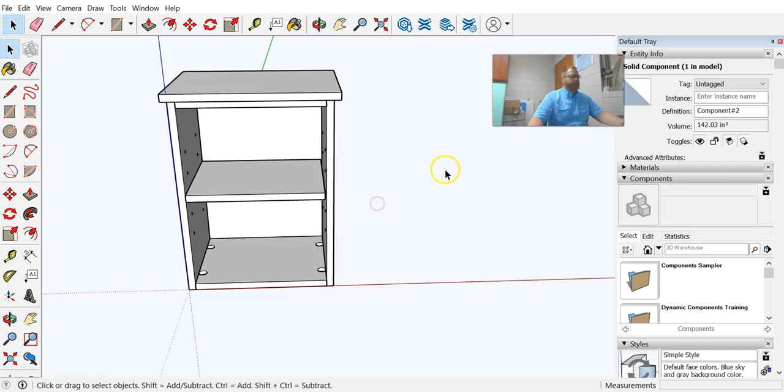Now it's time to take this drawing we've made in SketchUp and bring it over to Vcarve Pro. I'm going to do one final check, clicking on all these parts to make sure they come through as components, because SketchUp parts that are components will get disassembled when it comes to Vcarve. If they're merged together or not all components, it'll come in as one big clump, and we'd have no way of machining that in Vcarve Pro. So a couple steps here are super important.

I'm going to come in here and say File, Save As, and save this in my downloads because I don't want this on my actual computer. If I were you, I'd put this in your network drive. I'm going to call this Titus cabinet, and it's really important that we save it as an older version. For whatever reason, Vcarve Pro likes older versions of SketchUp, at least a year or two old, and 2018 I know will work. So I'll save the Titus cabinet as a 2018 SketchUp version and save.

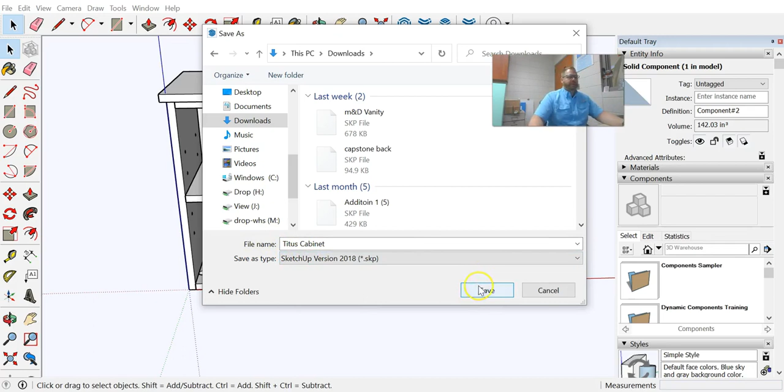Then I'm all done in SketchUp, and I can open up Vcarve Pro. Right now the current version is 10.5, but depending on when you watch this, that may change. Even versions going back to version 8 all look the same - there's very few differences, they just get smoother running. So this should last for quite a while.

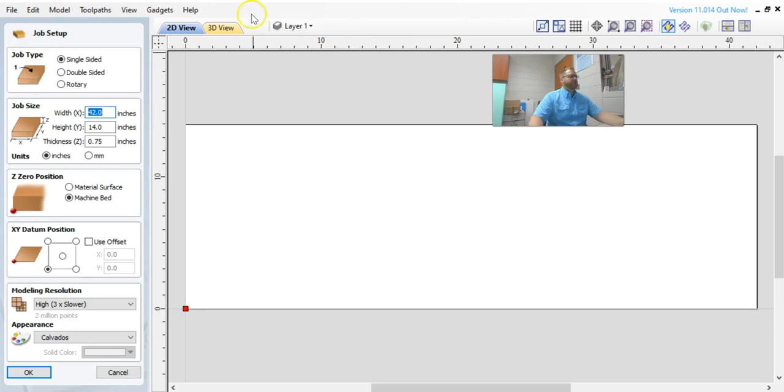I'm going to create a new file. This looks just like the things you've done already. We need to set this up correctly, so I'm going to go 48 inches wide and 96 inches tall. This is a whole sheet of material.

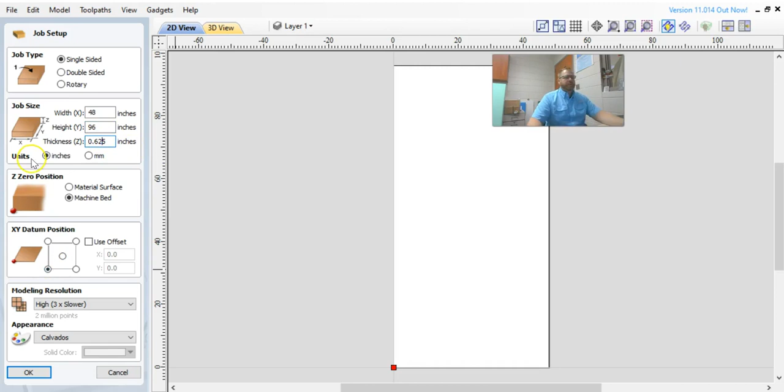It depends on where we have room on the sheet to get your parts drawn. We may move the XY0 with the actual CNC router, but we'll plan to put this in the bottom left corner. Our zero position will be the machine bed, our XY datum position will be the bottom left, and this is the other thing we've got to change - our material is 5/8 thick, or 0.625 - then hit OK. All of that is very similar to what you've already done using Vcarve in the past.

Now here's the new step. You come up here and we're going to say Import Vectors. And we are going to go to - I saved mine in Downloads, you probably put yours in your network folder. So I'm going to click on Titus Cabinet and say Open.

Now I get this here. I'll move my face down so we can see. There are some things on here that are really important to pay attention to. Largest face on top - I like that.

We may have to re-import things if they don't come through correctly, but what this says is most of the stuff with the information should be up - meaning the stuff with the line bores should be up. Gap between parts is 5/8 of an inch. We use a 3/8 router bit, so we can run this all the way down to a 1/2 inch if we want, but 5/8 is okay. It can be an inch - it really doesn't matter, we can move all this stuff.

SketchUp doesn't do arcs, it does tiny little line segments. So if you zoom way in on a SketchUp drawing that has a circle, you'll actually see tiny little line segments. Vcarve knows that, and it's going to refit arcs to boundaries - taking anything in SketchUp that's got a bunch of little line segments and making an arc out of it. Don't replace outer boundary - if we were just cutting out circles or rectangles, we could do that, but we're not going to. Import all visible data in File and hit OK.

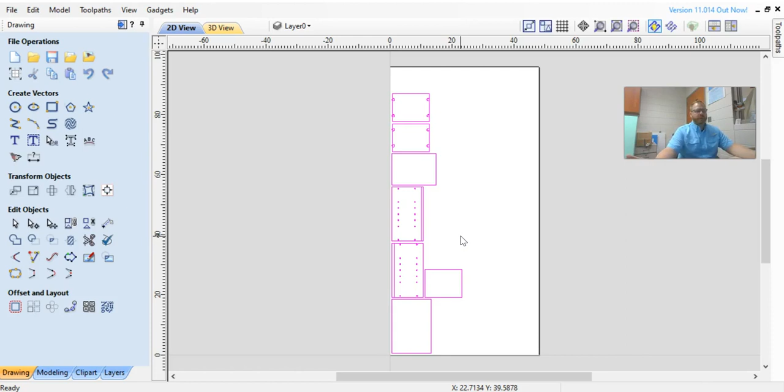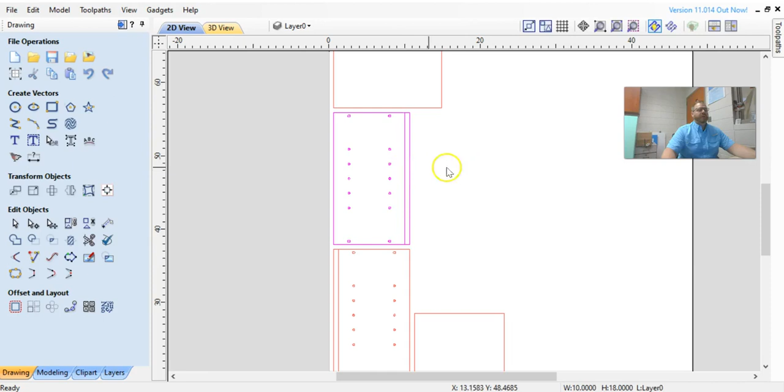When I click on this, all of the parts should be separate, but sometimes the way this gets imported, I'll click on it and it'll select every single part. If that happens, you'll just ungroup it—I can see it's happening here with this one. I'll click on it and say Ungroup Object back to original object layers. Now each of these parts is able to get edited with different tool paths. So it looks like I'll have to do that for any piece that has more than one chunk on it.

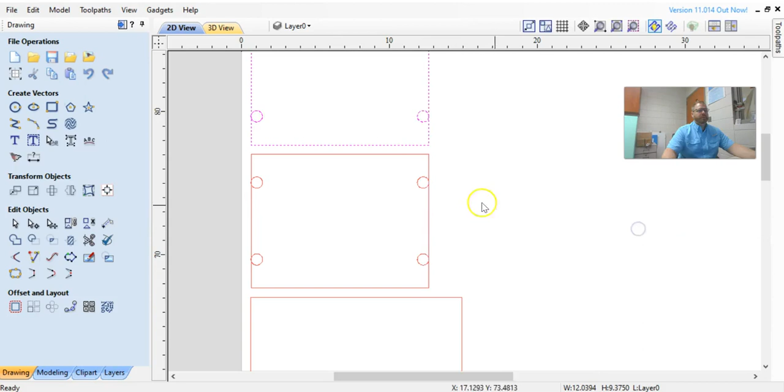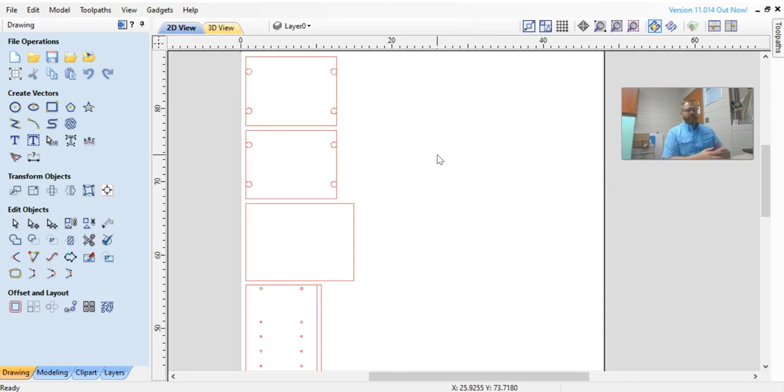You'll notice that when we bring things into VCarve, it all becomes two-dimensional. So even though we put depths on these things for the SketchUp drawing to make sense, when it comes into VCarve it gets flattened out and we don't have anything to do with depths. So we always like to cut and work from the inside out on a project, and I'll start with the easy stuff.

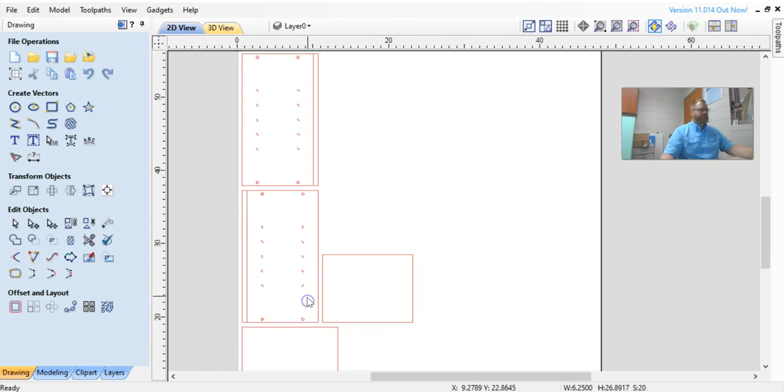So these line bores right here, I'm going to highlight these, holding down Shift to highlight all of them at the same time. Then I come up here to toolpaths and select this drilling toolpath. When I have the drilling toolpath selected, it's going to ask me what tool I want to use, and we're going to use a 5mm drill bit, even though this is a 1/4 inch hole.

SketchUp, VCarve, none of them care. The CNC machine doesn't care—it'll cut whatever bit we put in there. And the nice thing about this drilling toolpath is it references the center of the hole. So these holes could be 2 inches wide as we drew in SketchUp, but if we put a 5mm drill bit in, the CNC router is just going to find the center of the hole and drill it as deep as we tell it to.

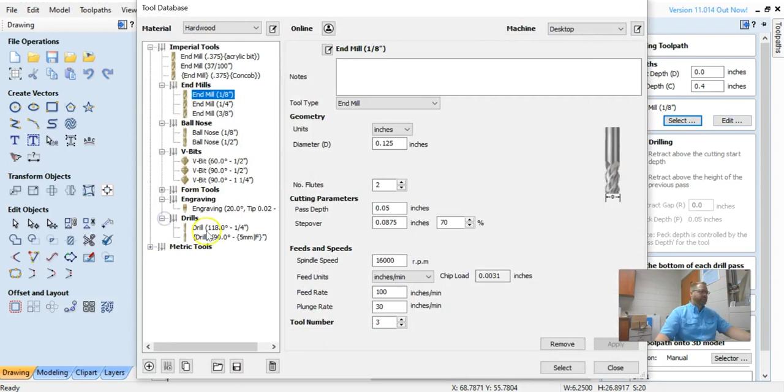So I'm going to come up here, hit select, and if I want to, I can hit this button here for the 90-degree drill bit that's in tool 3. If you don't have it, you can create it—again, it's not that big a deal, so we'll create one together.

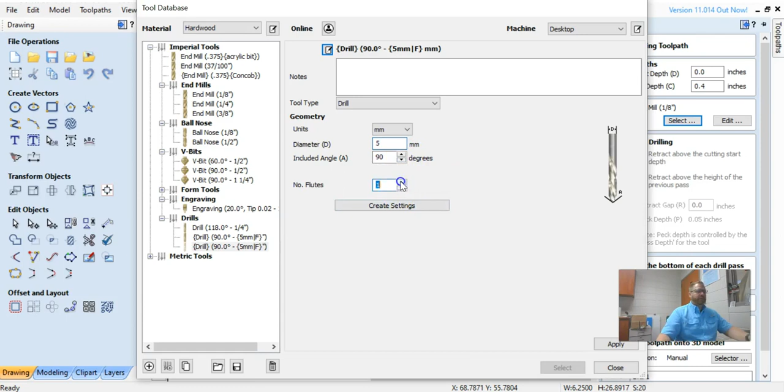We're going to edit this and call it a drill bit. It is 5mm, and we'll just call it line bore. Tool type is a drill bit. Units, millimeters. Diameter 5—actually, yeah, we'll leave that fine. Number of flutes two, create settings, and all of this is okay. I'm not super concerned about any of it.

We just need to know that it's in tool number 3. We'll say apply, then select it, come back here to toolpaths. Peck drilling means it's going to go down, come out, go down, come out, go down, come out. We don't need it to do that—it's not drilling super deep holes.

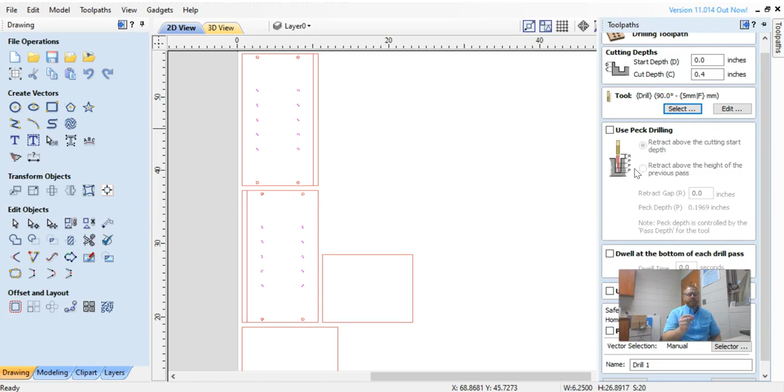Our cut depth is 0.4. That's just a little bit deeper than it needs to be, but because the bottom of our drill bit's not flat—it's got a point at the bottom—we need to go a little bit deeper so the actual usable diameter is correct. We don't need to dwell at the bottom of each pass, and we'll just call it drill 1, then I'll hit calculate.

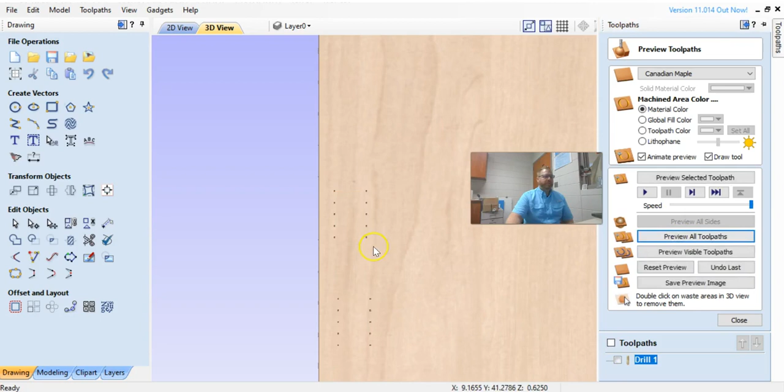So the red line is the drilling toolpath—each toolpath has a different color. If I want to preview visible toolpaths, you can see it drills holes, not all the way through. We shouldn't see daylight through there. So we're going to close that and come back to our 2D view.

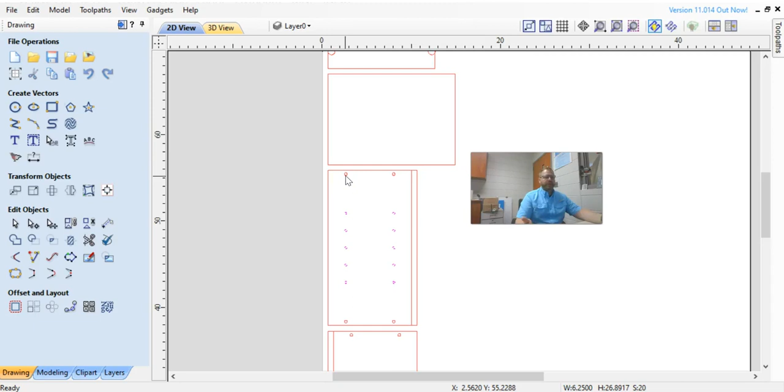All right, we got those holes taken care of. Now we're going to switch to, probably we're going to try it with a 3/8 bit to drill these holes. We want to do as few tool changes as possible because it makes the program cut much quicker. So I'm going to select all of these holes, again holding down Shift, making sure that they turn pink from red. Really wish it was different colors.

But I'm going to come up here and I'm just going to drill these out as a pocket toolpath. So the cut depth for these needs to be 10mm. If I don't know what 10mm is, this is where I'll have to do a little bit of conversion.

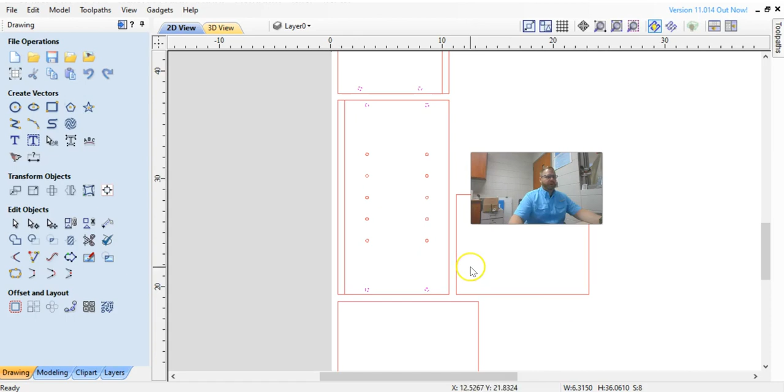It's about 0.4 inches, so that's where we got 0.4 from. If they go a little bit deep, it's not a problem, so we're going to say 0.4 inches.

We got the right end mill in. Mine is just a little bit less than 3/8, but we can use the 3/8 end mill.

The reason I do a smaller one is as a tool gets used up, it actually gets smaller as the edges get dull. So when we're cutting things like dados, and we'll do this on the next project, we actually lie to the CNC router and tell it the bit is a little bit smaller to overcut our dados, but we don't need to worry about that today because we're not overcutting any dados.

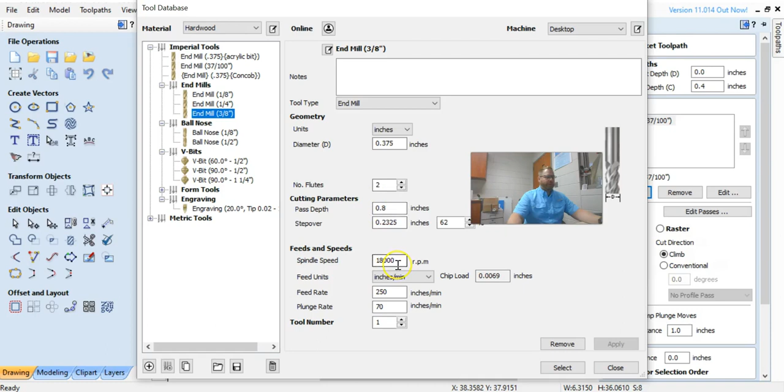So I'm going to select my end mill, pass depth 0.8, that'll cut all the way through, spindle speed, feed rate, tool number, that's perfect. I just need to make sure I remove that so I don't have two of them going. Ramp plunge moves, that's good.

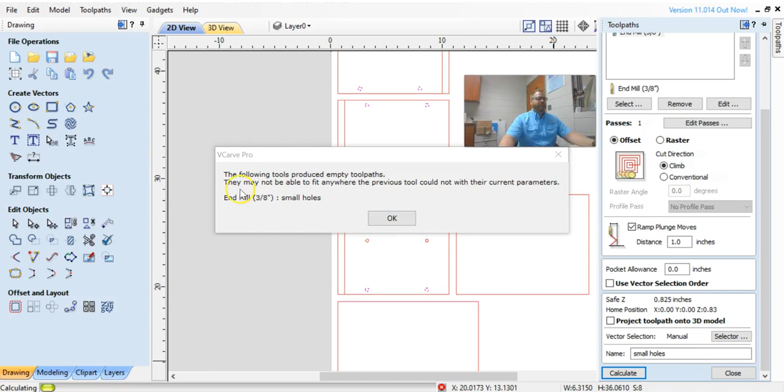And we're going to call this small holes and calculate. So I get this error message that says the 3/8 bit won't fit in there. So I say okay, I've got to come back here to small holes, open this up, and remove this.

I have got to go with my 1/4 inch end mill, which is in pocket or tool number 2. You can create this if you don't have it. Spindle speed 18,000, that's perfect. Pass depth, that's great, that's great. All that's good. Select. It's going to do it in 2 passes.

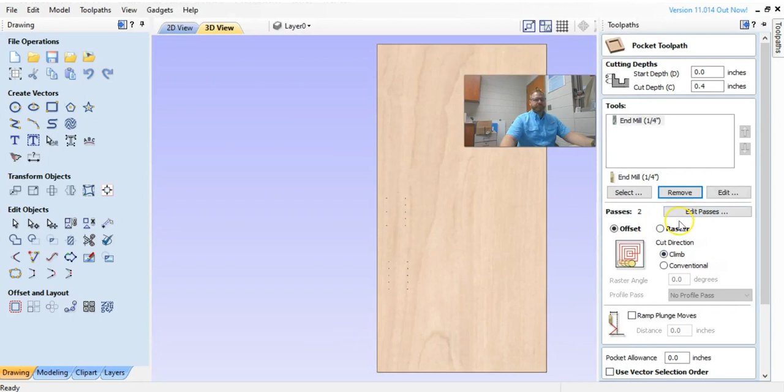That's fine. Ramp plunge move for 1 inch, and then hit calculate. And if I want to, I will preview all tool paths, and I see I got those holes in there now. So the geometry of the 3/8 bit just didn't work.

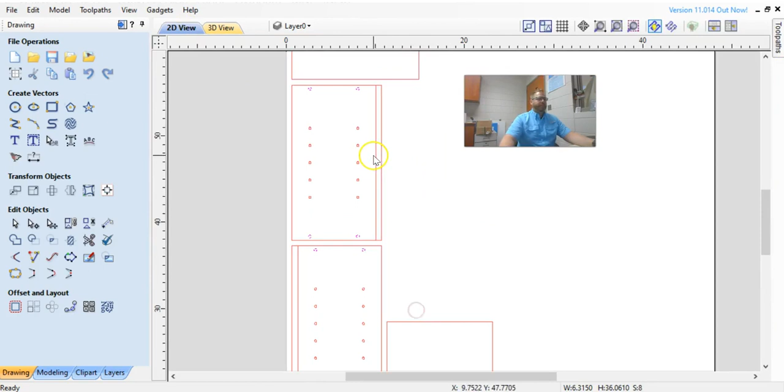So we have an extra tool change in there, which is fine. These are called rabbets. This hides the back from the side. And because we're using a round cutter head, we just have to make these rabbets a little bit longer, because if I have a round tool, I don't want them to be touching.

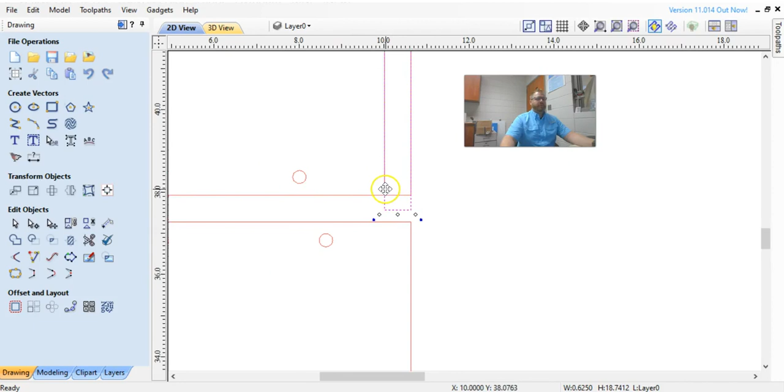I can always zoom in. If I've got a round tool cut path and I stop right here, I'm going to have little fillets or little radiuses left in the corners, and I don't want that.

If you're having trouble adjusting the size of your rabbets, like if you click on the square or if you click on the rectangle and it selects the whole thing, that's okay. Sometimes SketchUp gets funny too, and it will put extra rectangles in here.

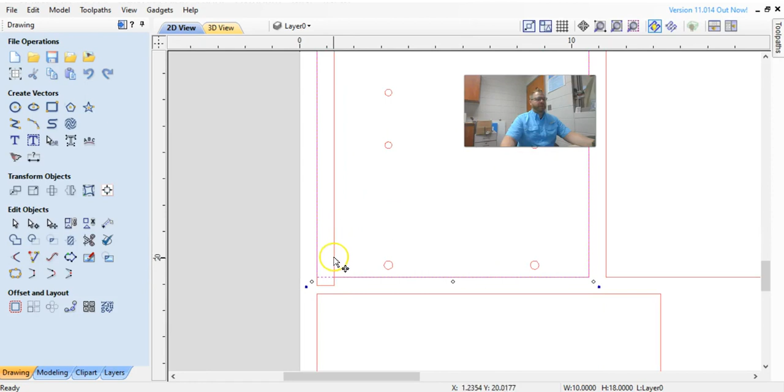So when I click on this, it selects the outside, which is good. But every once in a while, you'll see that red line come to the inside here, and it will select inside because there's an extra rectangle there. So it would look kind of like this.

I'll just draw one in there so you guys can see it. You don't have to do this.

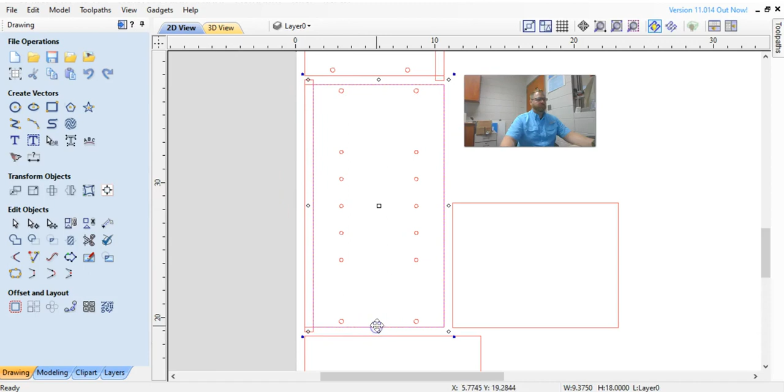So sometimes this will happen. When I click on here, the actual pink line that's being selected is inside the rabbet. Now the problem with this is if I use my 3/8 bit to cut this all the way out, it's going to cut the rabbet off of my project. So if you see this happening, you can click on that line and hit delete.

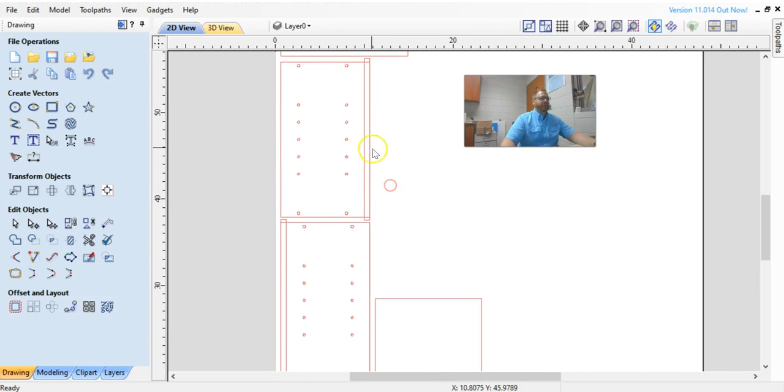Okay, so now I'm ready to cut my rabbets. So I'm going to select here, and I'm going to select here. I'm going to close this, do a pocket tool path, and I'm going to have my rabbet cut.

We have half of 5/8, which is 5/16. If you don't know the decimal for 5/16, I don't remember it either. It's 0.3125, so we're going to cut it 0.3125.

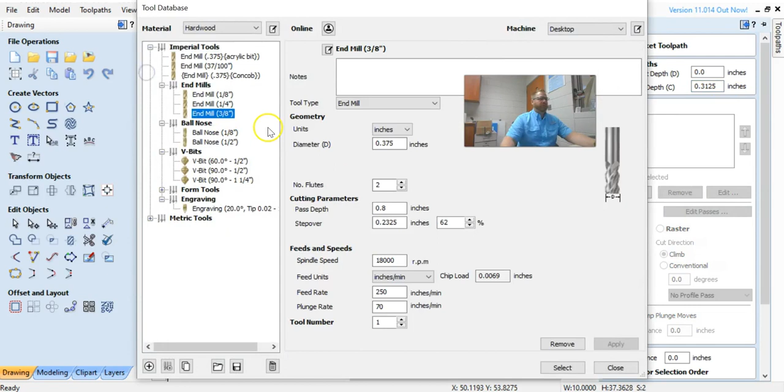And we're going to go back to the 3/8 end mill. Select that.

And we'll see, we may have to, if this lets us cut a little bit extra, I think we'll work. This one will work just fine. We're going to call this rabbet.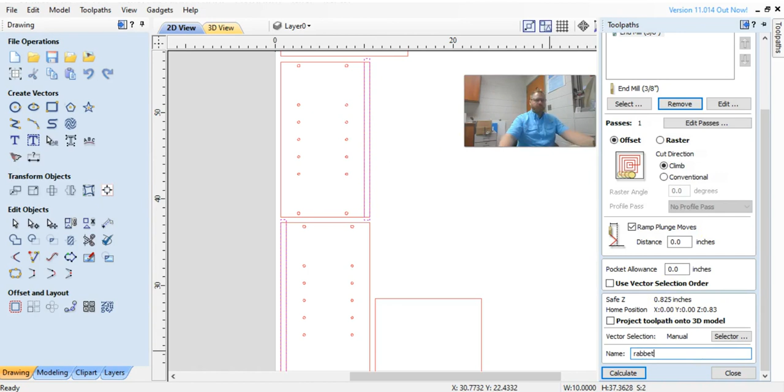Ramp plunge moves 1 inch. I forgot to put the inch in there, and then calculate. Okay, that's perfect. So again, that's not cutting all the way through. We should be good to go there.

So if I turn on my tool path so far, I can see I've got the holes done, the little holes, and these. I think the next step is to cut out these circles. So these circles, we want to make sure that it cuts out the whole pink line.

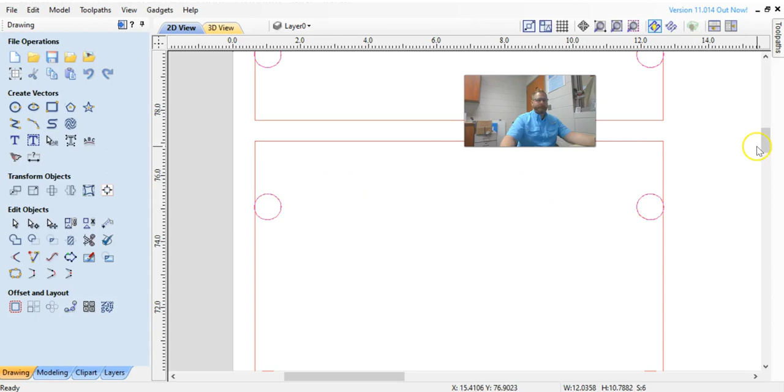I'm holding down Shift to keep them all selected. For the tool path, we'll do, whoops, not a profile tool path, because we want to buzz all of the lumber out of there. Cut depth, we'll go back and look at here.

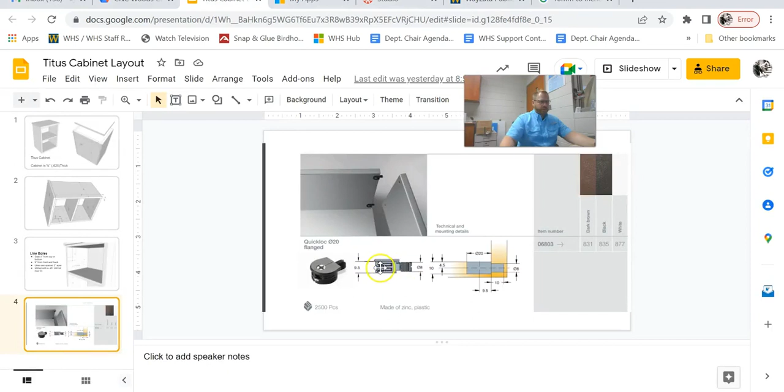Those are 9, we'll cut a 10 millimeter deep pocket for that. So the actual thing is 9.5 millimeters, but we'll cut it 10 millimeters deep just to give ourselves a little bit of margin. 10 millimeters, we said, is about 0.4 inches.

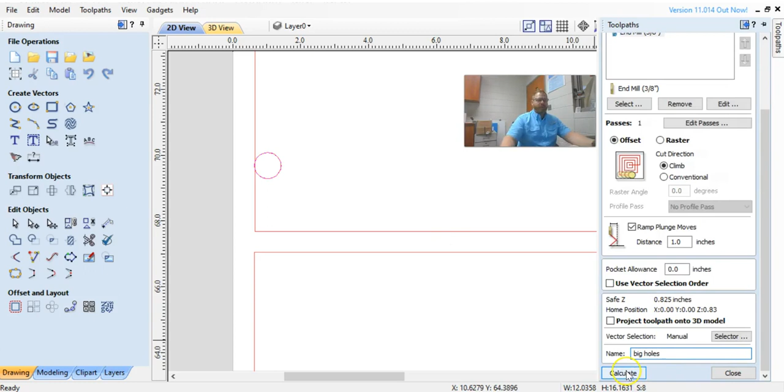We'll use that end mill, that's 3/8. That's perfect. 1 pass, ramp plunge moves, and we're going to call this big holes. The more tool paths we get, the more we want to label those so we know what they are.

So we check that out. I'm going to preview the tool path. And we got the 4 holes, and they are bigger.

So that's good. We're running out of things to cut here. So now I'm going to come up here, and I'm going to do these profiles.

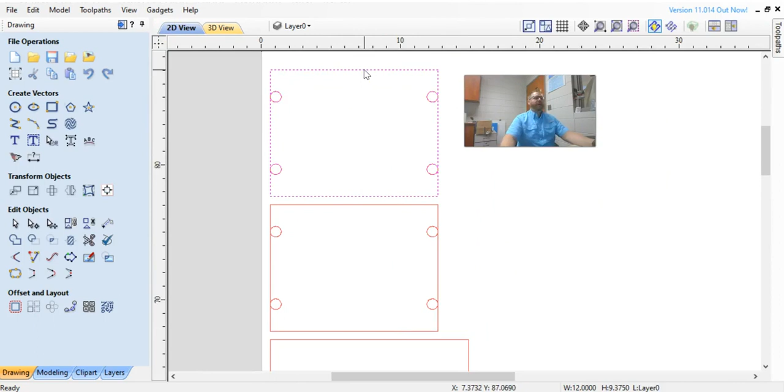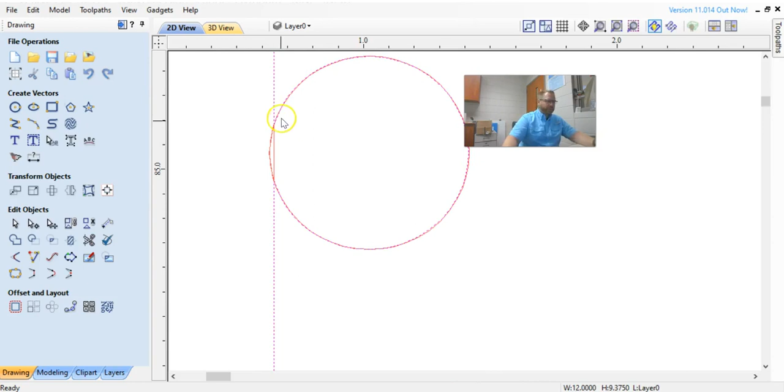Make sure once in a while you'll see when you select this, and that's what I'm having happening here, is it is cutting inside here. So when I click, I can see it turn purple inside of here. Now that's a problem. We don't want to do that because when we cut this out, it'll take the 3/8 router bit, boom, and cut out the hole that we just made.

So if you can zoom in far enough, you can see that you've got a rectangle in here. I guess that's not going to help me either. So we're kind of stuck at this point, drawing a new rectangle.

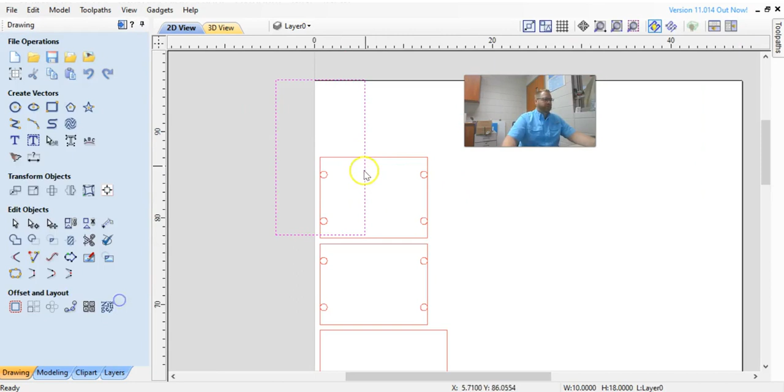So I am going to take this, and it just dumps a rectangle in there. If I wanted to, I could get picky with the size, but SketchUp or Vcarve is so nice, these just snap right to the sizes that they should be. And I'm going to hit Control C, Control V, so I copied it, and I'm going to put one down there as well. So now I have a new rectangle laying on top of that.

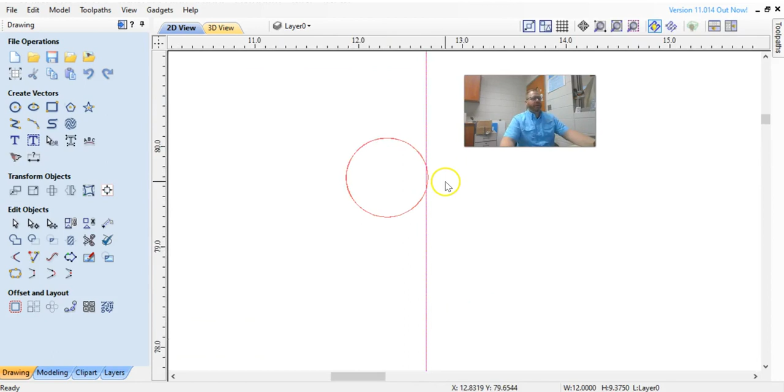It's not cutting that circle out, so I'm going to select that one. I'm going to select this one, making sure that it's not cutting out that inside circle. I'm going to cut this guy out. When I cut this out, I'm making sure that it's going to cut the outside. So that dashed line should go through that.

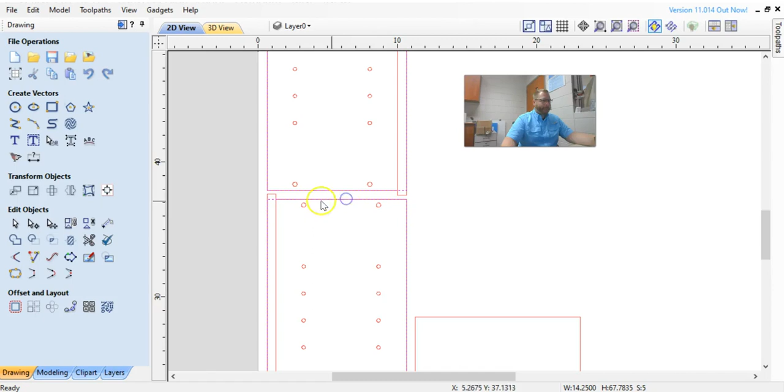That looks good. This looks good. That looks good. So now I'm cutting out the outsides. Oh, and I may have to select them again. Okay, they stayed selected. Good.

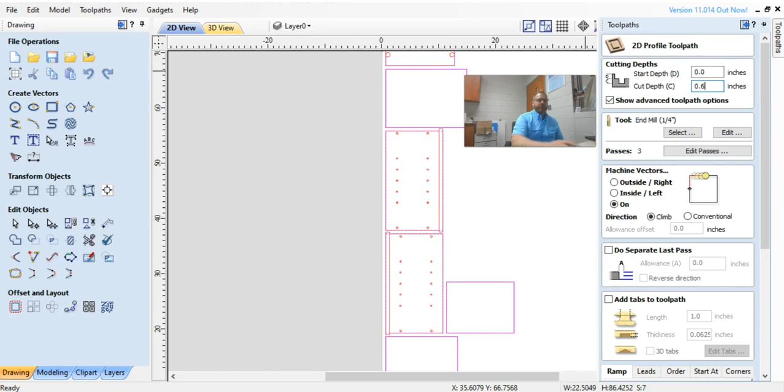We're going to switch to our 3/8 end mill. All of this stuff should be saved. And we want to cut on the outside because we want to preserve the size of these pieces. We don't need tabs.

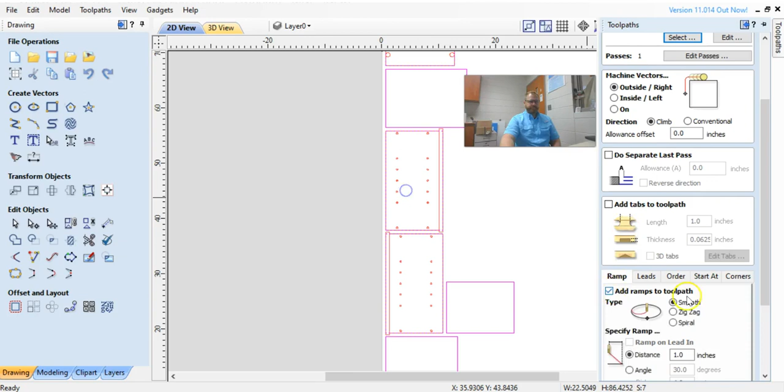1-inch ramps, and we're going to call this the outside cut, and we're going to calculate it. It's going to give me a warning that it's going to cut all the way through, which is what we want it to do. And then we're going to come back up here, preview all tool paths.

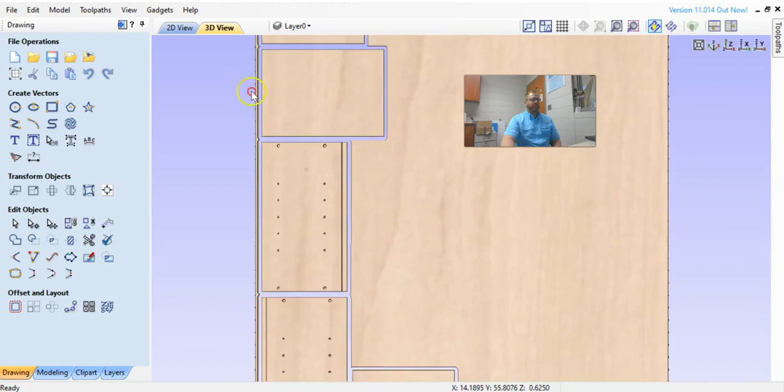All right, so we're cutting all the way through, and notice it's cutting out and making just a little tiny flat spot on those pieces, which is perfect. Cutting all the way through there, cutting all the way through there. Those look awesome. All right, so now I would definitely save this.

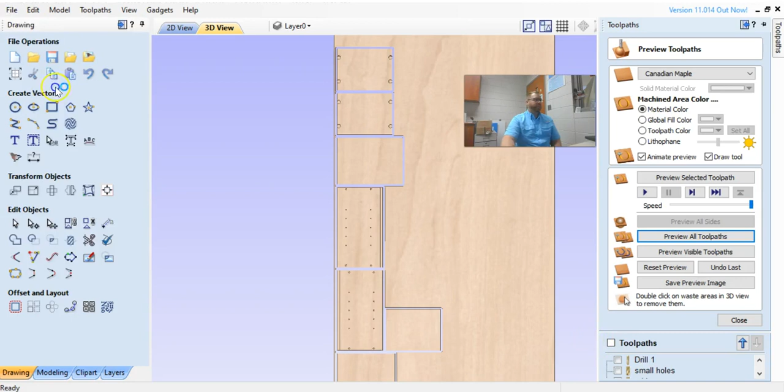You just put a ton of work into this. I'm going to save this in my network drive because I don't want to lose it, and I'm going to find the CNC class.

And I'm going to save that. Okay, now let's run this preview so we can see what's happening.

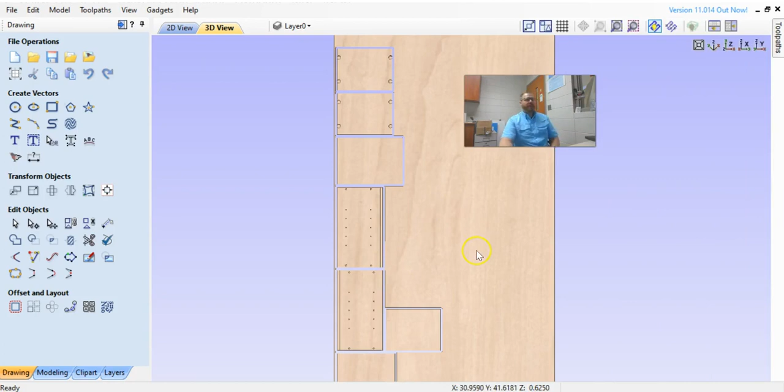A couple things you're going to want to look for: it's really common that we accidentally cut all the way through here. We want to see that there is still wood left there, so those Titus connectors work.

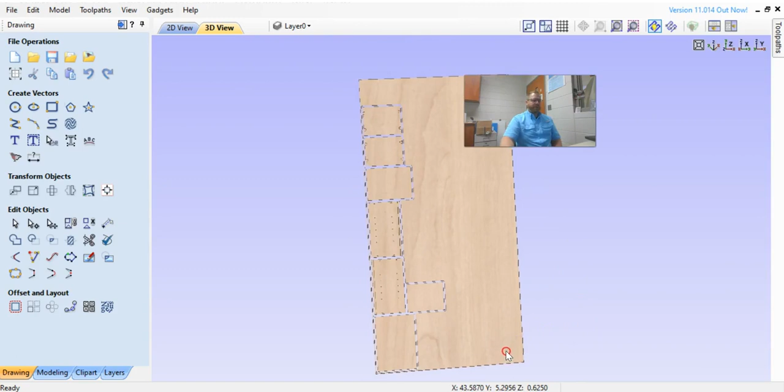What I'm going to have you turn in for a grade on this project is this - we're going to get this to a window so we can see it. And actually I don't really care about that, we're going to export PDF.

Export this PDF and save it someplace you'll remember. I'm just going to put it in downloads again. And I'm going to go look at that real quick so we can see what it should look like.

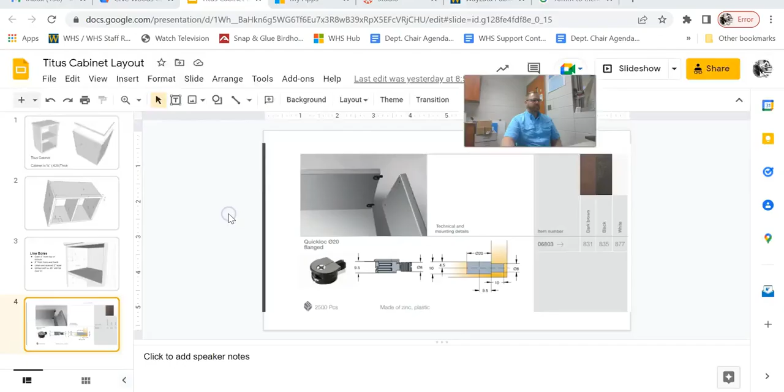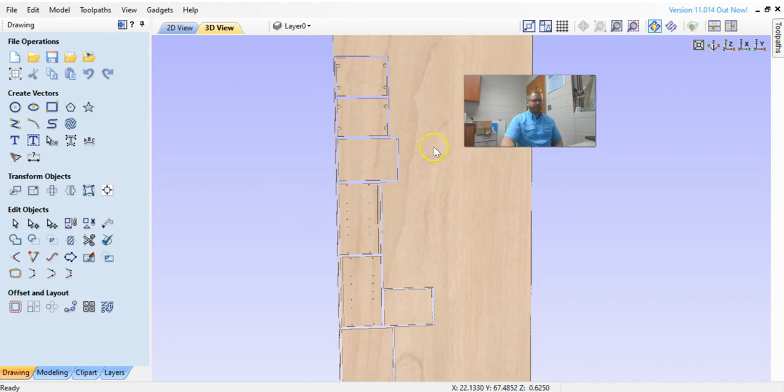So you'll turn this part in for a grade, and then I'll also grade the actual project that gets built. So we'll be able to see this. Really double check this, there's a lot of parts that could go wrong here, and I want to be careful.

So we want to rearrange this so it fits a little better on our page. One thing we don't have to worry about is grain direction. I'm going to do this, and I want everybody to get a third of a sheet.

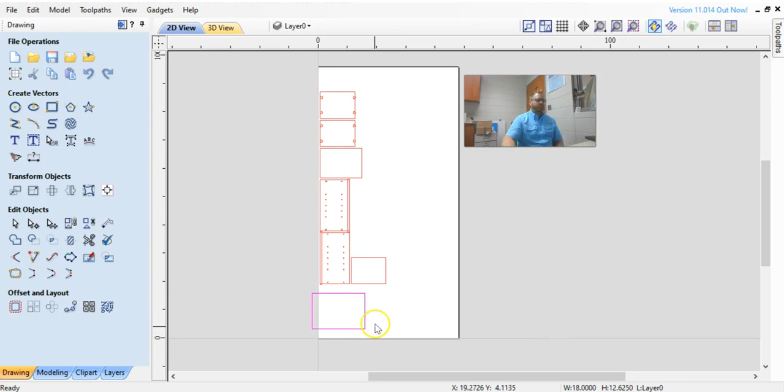But if I hold down Control and hit 9, I can rotate that so it goes this way. We'll see what the best way to do this is - we just want to use all of our materials up very well.

Oops daisy, I didn't select everything, so stuff was moving where it shouldn't move.

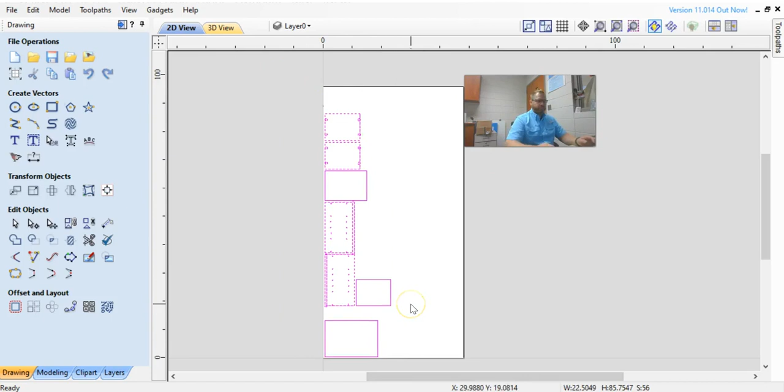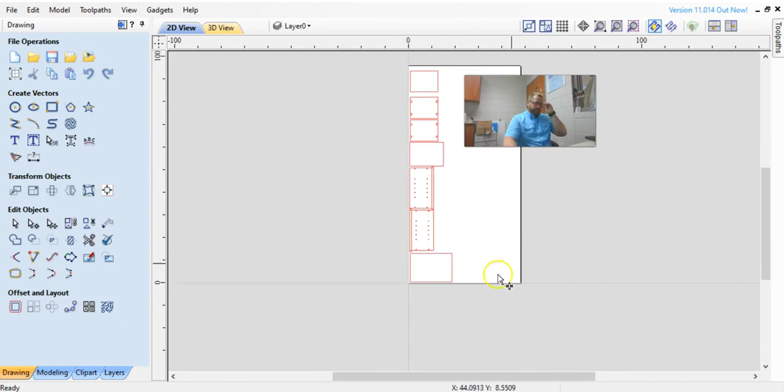So now I've moved things. So if I turn on my tool paths, they're not in the right spot.

So I right click here and say recalculate all, and it moves them, giving me a warning that it's going to cut through material, which is fine. But now everything's back in the right spot. Tool paths are there, I just don't like seeing the tool paths on, they confuse me.

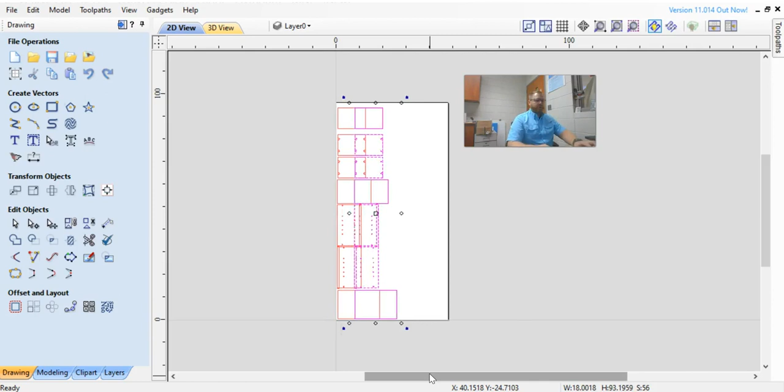So now if I am going to cut out more people, you don't have to do this, I'm just going to show you. So you'll easily be able to fit one more job in here.

And let's see if I can get a third job. We could get almost 3 people out of here.

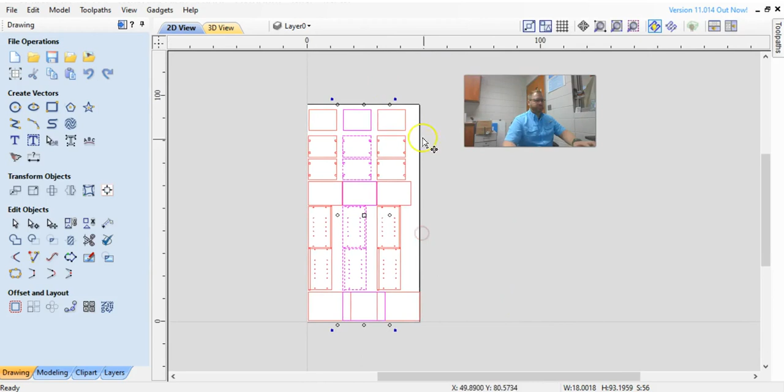We'll play with that a little bit. I'll probably also have you turn in your Vcarve file. That way I can open it up and we can manipulate it to where it's going to fit best on the sheet that we have.

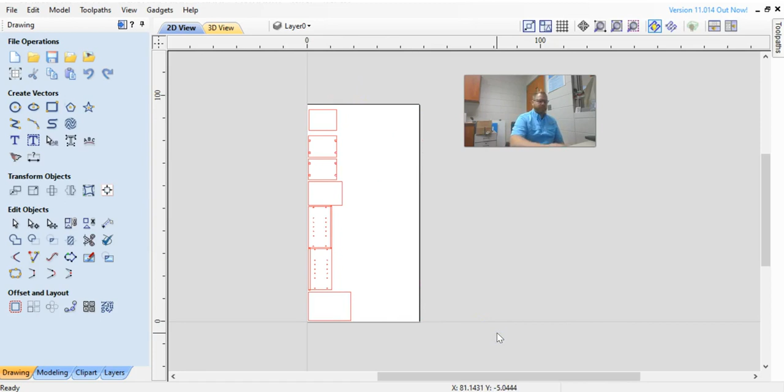So at this point, I'm just going to erase these 2 because they're in the way. I could save my files here. Now we want to do as few tool changes as possible.

So make sure visible tool path to one file is selected, and start with the drill, do the small holes, then end with rabbet, big holes, and outside cut. Notice those last 3 are done with the same end mill - we don't want to be changing back and forth if we don't need to. So 3 tool changes is enough.

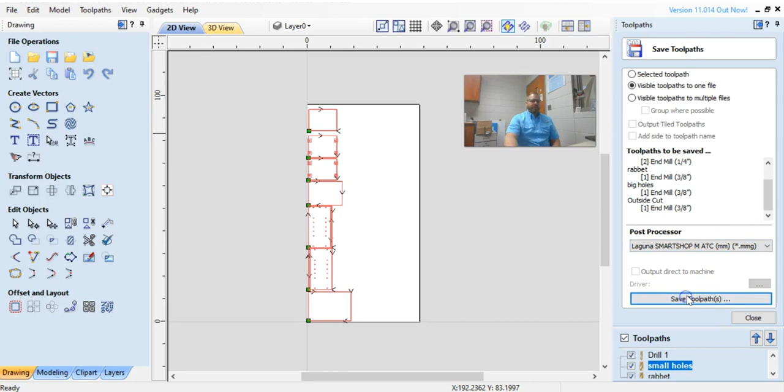SmartShop M ATC, and then we save this MMG file. I'm again just going to put it in downloads, but I want to go look at this, and you can see how many lines of code we have.

So there's 700 - there's a lot. There's 7,000 lines of code to do all this and all these tool changes.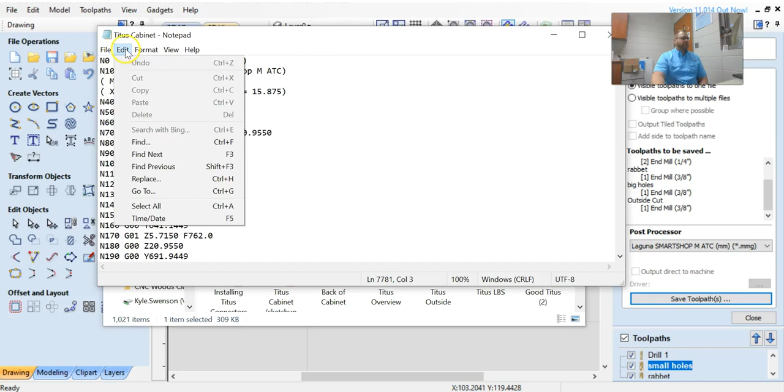So I would go edit, find next. Let's go Z negative. And we don't want to go much deeper than that - that means we're cutting through.

So that negative 0.127 is going to be that 5,000ths of an inch that we're cutting through. So as long as we don't see Z's that are any deeper than that, we should be fine.

We're also going to say find next. Oops.

We're going to say tools, and we're going to see that we are using tool 1, tool 2, and tool 3.

So just make sure that those are in the right order. We start out with tool 3, then go to tool 2, then go to tool 1. If you can double check those things, that will eliminate a ton of our mistakes.

So this is a pretty long video. You guys are going to do great. Looking forward to building this with you guys.